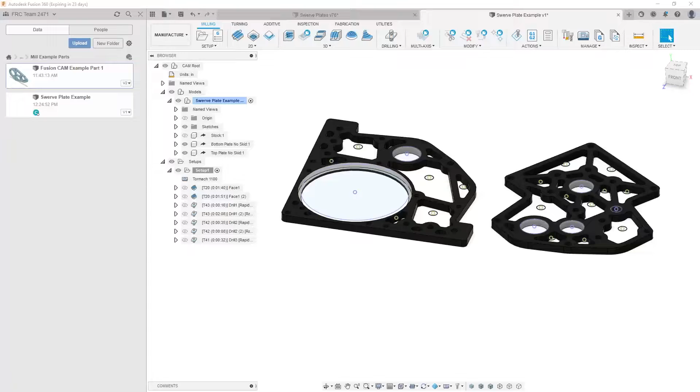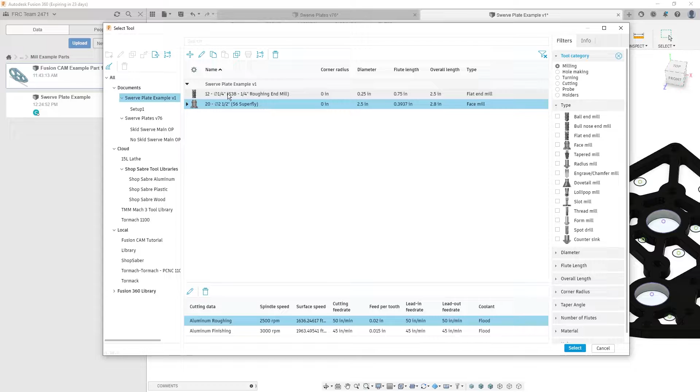So now that all the holes have been drilled, we are ready to get into actually starting to make this look less like Swiss cheese and more like an actual part. I'm going to start out with a 3D adaptive clearing. I'll grab number 12, which is our roughing end mill.

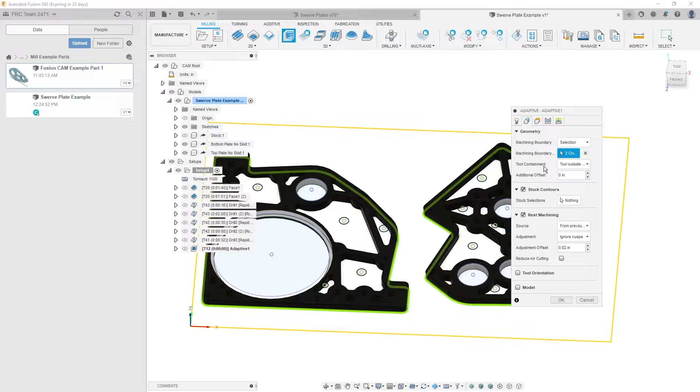And for the geometry, what we're going to do is set our selection. I'm going to grab these parts. I'm going to tell it it's anything outside the boundary, which means it will cut everything inside it, but will not cut outside. If we didn't do this, the 3D adaptive is going to try to get rid of all the stock.

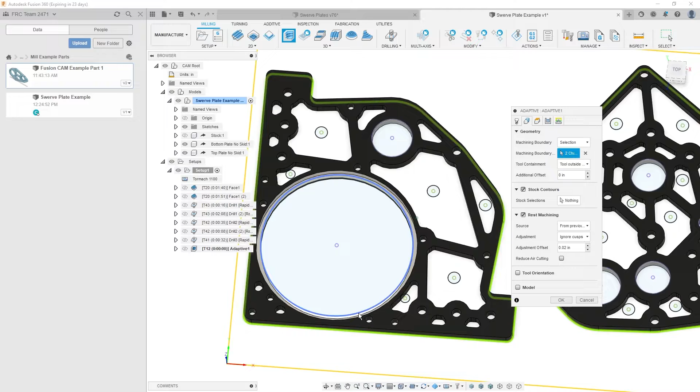We don't want to do that since we're doing it from a larger sheet that we're going to cut it out of later, right? But it thinks that its goal is just to get rid of all the stock. We want to just get rid of stock that's unnecessary within the part's outside profile. So that's why we're doing this.

Rest machining we will do from previous operations. This will just make it so that it actually looks at where there are holes for it to go into. And also it will not try to kind of cut in a corner where there's a hole. So that will just kind of speed up our cycle time a little bit.

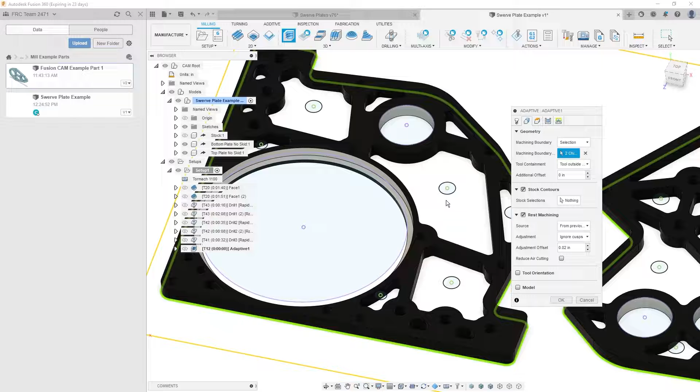For our bottom height, we're going to go ahead and do stock bottom. I'm going negative 0.03. And then for stock to leave, we will go 7 thousandths on the radial, and we will go 0 on the axial.

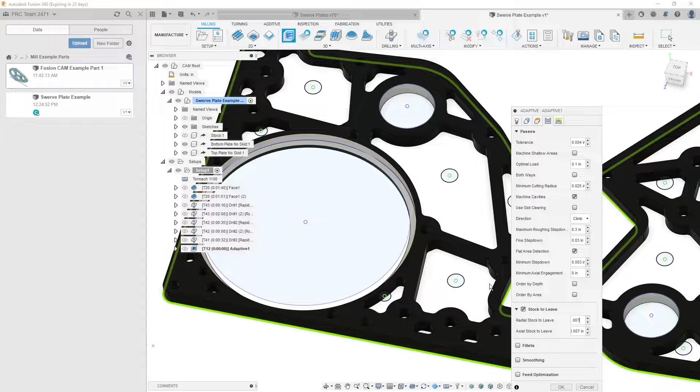And we're going to hit OK and see what that generates for us. So we'll give this a second to generate. And I have an idea of something that's going to generate that we're not going to like, but we will see if that does in fact generate how I believe it will.

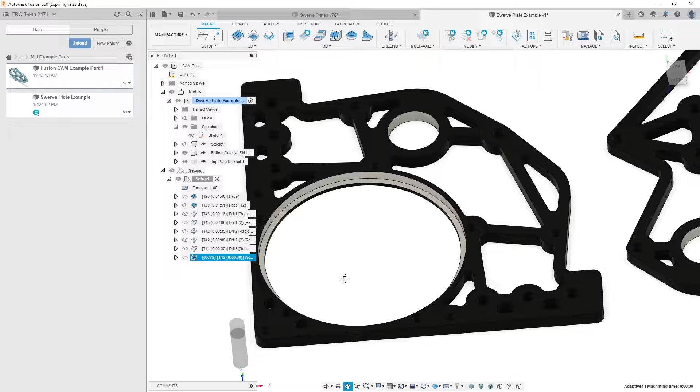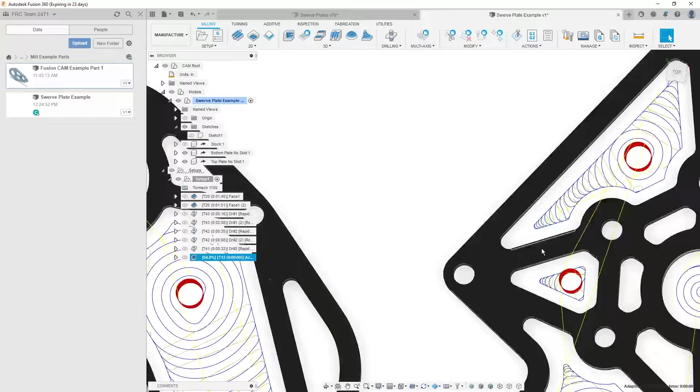So it hasn't quite finished generating, but I've already noticed a few things that it's doing that I do not want. First off, it is not forcing a plunge move, it is forcing a helix, which is okay. That's relatively simple for us to force. But also, it is going into some holes that we do not want it to go into. Just because of how we have set it up, drilling, and drilling out those corners, some of these helix moves we just don't want.

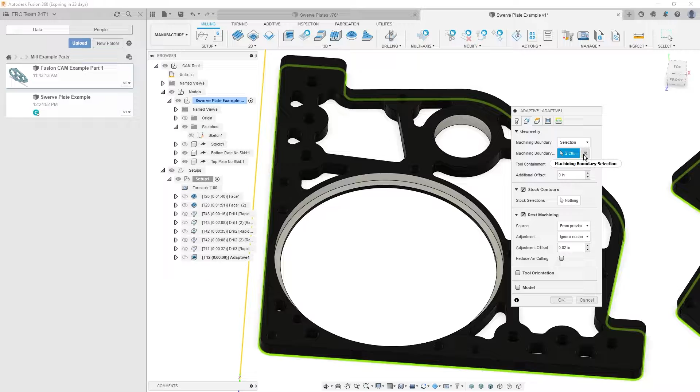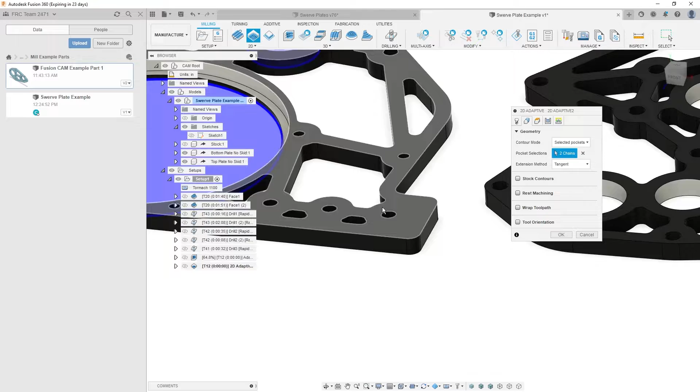So what we're going to do instead, we're going to do geometry. Well actually before this, we're going to right click it and hit suppress. You can't suppress it when it's being generated. Okay. Anyway, we'll ignore that for now, and we're just going to grab all of these bearing bores. This will just isolate them so we don't have to worry about them.

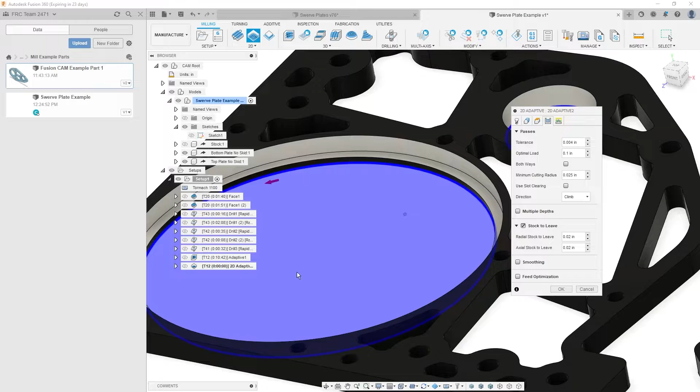The 2D adaptive is going to make it so things generate faster, and it will make everything a little bit neater for us. And the most important thing is we need to have this large bearing bore be separate, since it has this flat pocket kind of edge we've got to deal with. In the 3D adaptive, with a stock bottom on our bottom height, it's not going to treat this shelf properly, and it's just going to cut right through it.

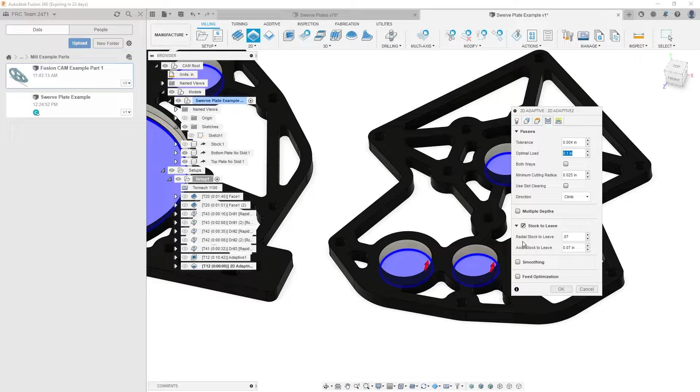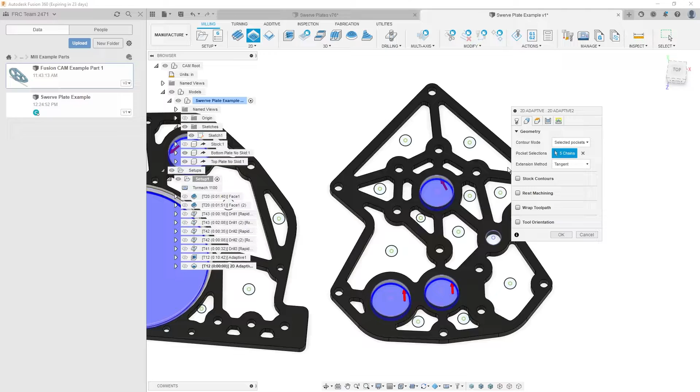So anyway, we'll put 7 thou, not 70 thou, oopsies, 7 thou on the radial, 0 on the axial, and then we're going to do plunge. We're going to hide the sketch, entry positions, we're going to click these, and then we have 5 chains, and we have 5 entry positions, so that looks good to me. Perfect. That generates all fine and dandy. So that's exactly how we want it, and we're going to move on.

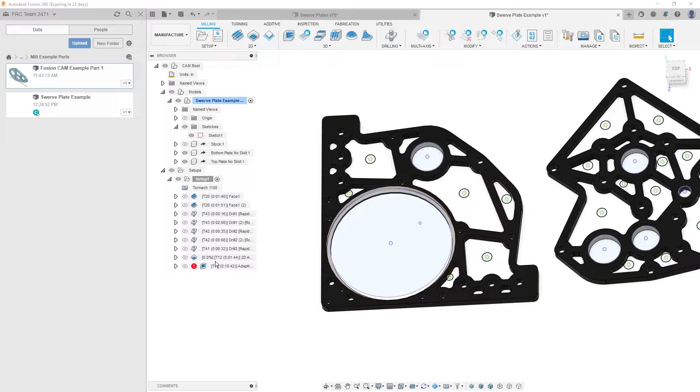We're going to put this above our 3D adaptive. We're going to go into our 3D adaptive, and we're going to get rid of these machining boundaries. Instead of over parts, we're just going to select the actual ones we want to machine. This one, this one, this one. So basically all these that we've drilled with a 266 drill. And we're just going to force it to go inside all these.

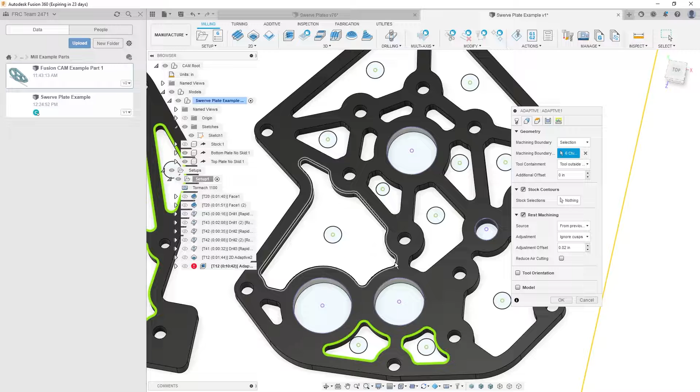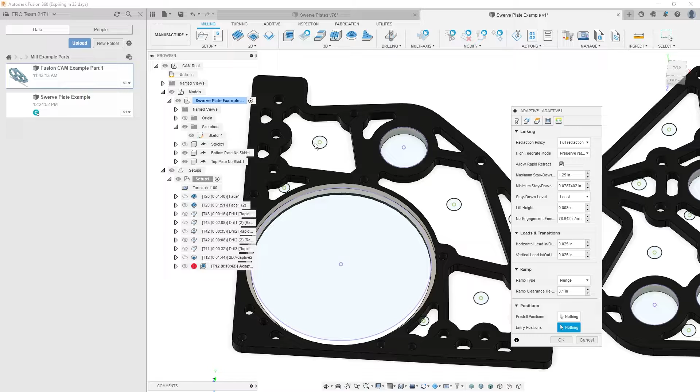Right, and it's got 14. So then this is all okay from before. For our entry positions, well, first for a ramp, make it plunge, entry position. We are going to say 1, 2, 3, 4.

Yeah, and we have 14 entry positions and 14 machining boundaries, so we shouldn't have missed any. So this will go ahead and generate. So I got an error. I don't know why. We're gonna check this out. So it says feature flag and adaptive turn roughing, which makes no sense because we're doing a 3D adaptive, not a turn roughing, which would be for a lathe. And the error is an internal CAM kernel error. Please report 3D.

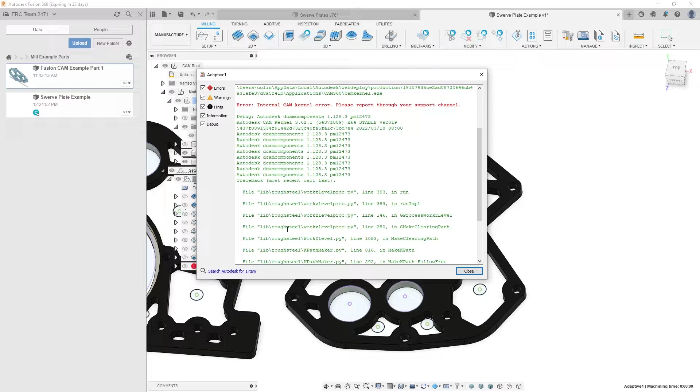So usually these error codes are a lot more kind of point you at a direction, like a lead fail or something. But in this case, I have no clue. So we're just kind of going to go through this again. One thing I'm going to do just to see, I'm just going to uncheck rest machining. There's no reason we need to rest machine this at all. So we're just going to see if that works, and we'll go from there.

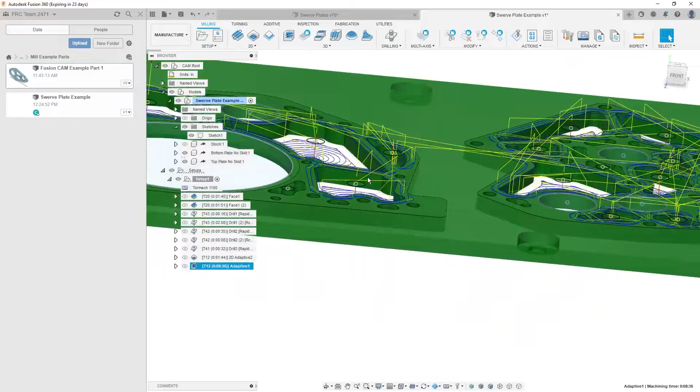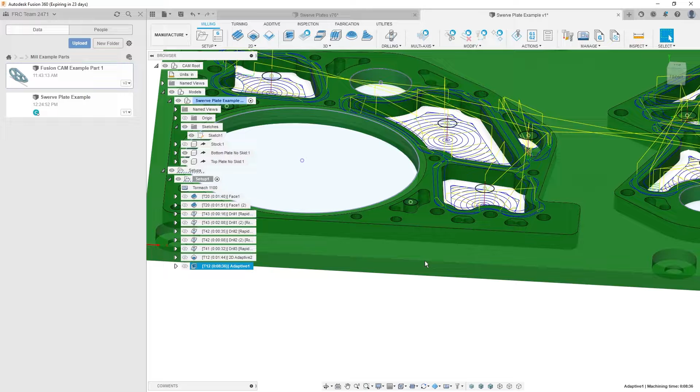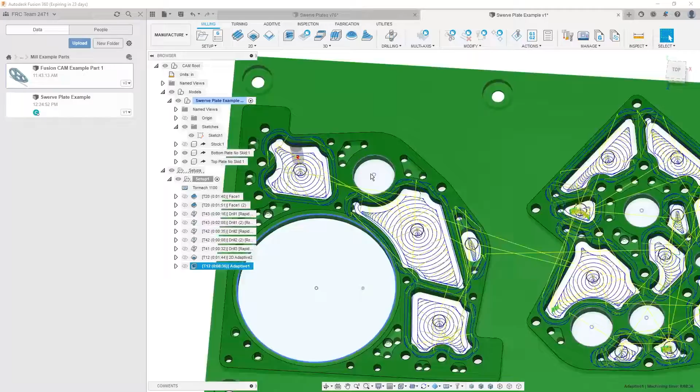So we finished generating it, and something weird has happened. So it's trying to get around the edges of these pockets, and the reason for that is, once again, the 3D adaptive, the stock that it's spacing everything off of, is only so accurate. So since we got rid of rest machining, it doesn't know that we came in and we faced this off. So it thinks there's still stock there. It thinks it's the very beginning where we have this 15 thousandths of material above it. We weren't able to use rest machining because it was creating some form of error, but that's okay. We can simply get around this.

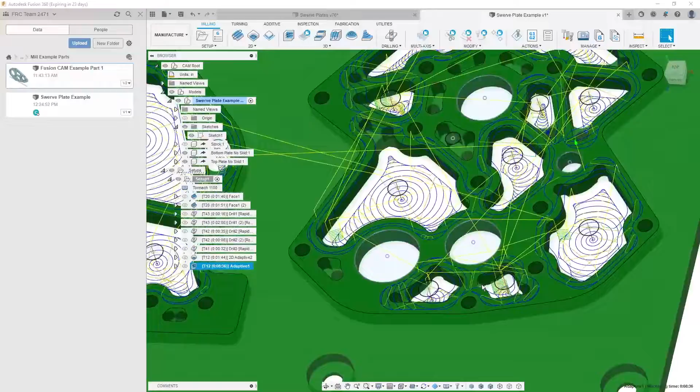But also, another thing I notice is in here, it's doing these weird little step downs. So it's going to come in at this height and do this little tiny cut and go all the way out and then go all the way up, all the way back down, little cut, all the way up, all the way down. That's going to just waste a lot of cycle time, and it looks like it's doing it there too. So it's doing it in a few spots, and that's a fine step down. For some reason, Fusion is thinking that there is a feature here that needs to be used with fine step down. There is not, so we're just going to override that.

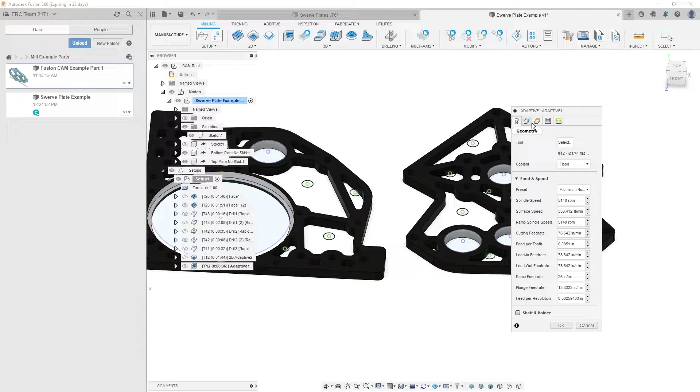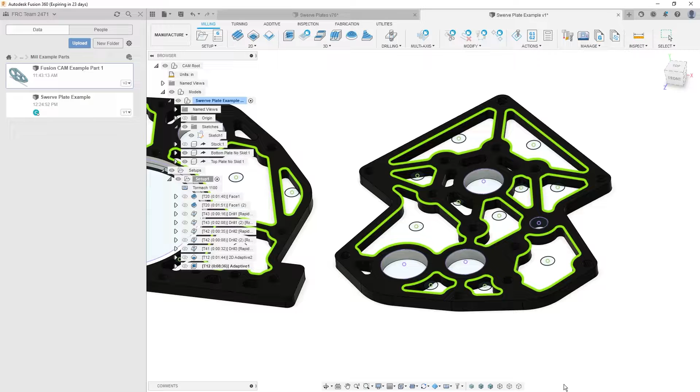So we're going to go back into this adaptive once again, and we're going to fix two issues. First off, instead of saying stock top, we're going to do selection, and we're going to grab the top of this face. So that should get rid of that first issue with it cutting on top. Then to get rid of those fine step downs, under our passes tab, here we have our maximum roughing step down, which is 0.3, which is good, and we have our minimum roughing step down. Our fine step down, that's at the 30 thousandths. So we're just going to get rid of that 0 in front of it, set it to 0.3, the same as our maximum, and that's going to force it and say you can only take a 0.3 step down, or less, obviously, but you can't take like a 0.1 or a 0.2.

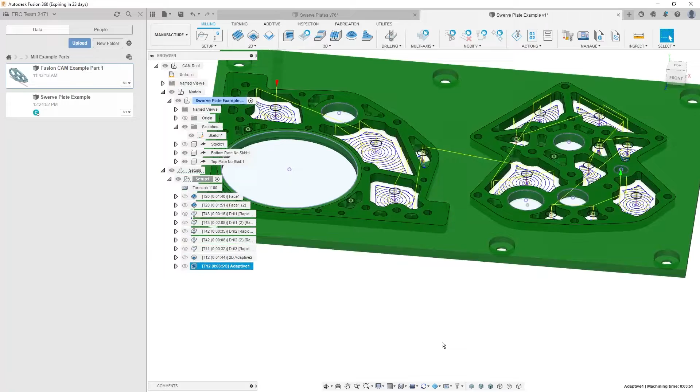And we can also see how fast that generated now. And we went from 8.5 minutes to just under 4 minutes by getting rid of those two settings. Granted, most of that was definitely the top height being wrong. However, this is looking very good, and we're going to go ahead and get into the 1/8 inch tool. So we're going to start by doing a rest machining on this.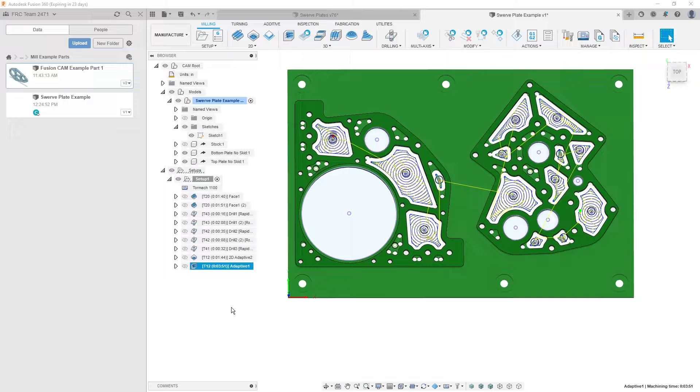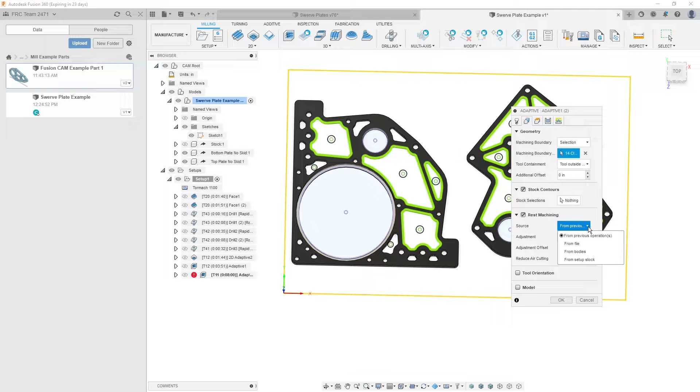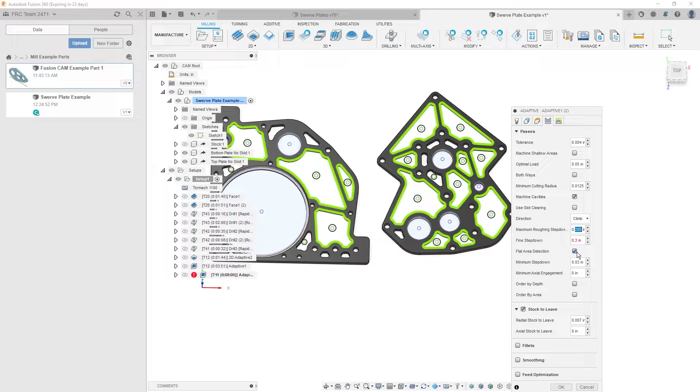To do this, we're going to duplicate this toolpath once again, Control T, right? But we don't want a 1/4 inch tool, we want our 1/8 inch tool. So go to our tool library, it's tool 11, we'll do aluminum roughing, boom, geometry, this is all okay. Stock contours is okay. Rest machining, we'll do from previous operations. We're going to click reduce air cutting. That's going to try to reduce that fine step down stuff that we did see. However, we are going to override it manually too. This is all perfect. Since we just duplicated it, this is okay. And this fine step down, it's zeroing out because it is now larger than our maximum. But we will just, oopsies, we gotta put a decimal point in front of that. Toss that in there, and we will be good.

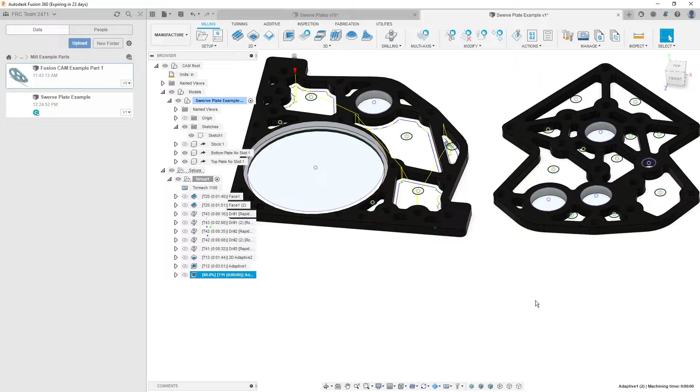Entry positions are saved. And we're gonna call that to see how it generates. Yep, and we can already see, right, on these ones it's just barely rubbing those corners, and on this one it's got to go a lot more. It's going in and it's getting those corners perfectly, and that's exactly what we want to see. It's doing some, you know, a little funky stuff, but it's pretty darn good for what it is.

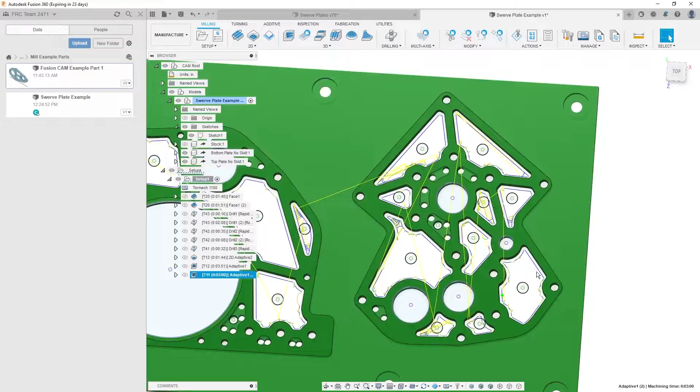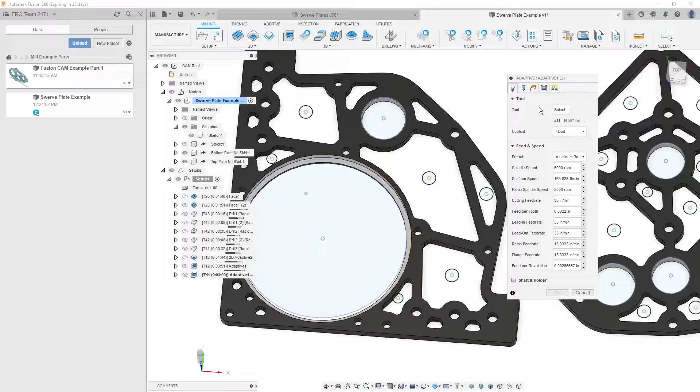Okay, so now what we need to do is we need to make another 3D adaptive, but this time instead of doing a rest machining, right, we need to get all these spots that we didn't get in this first round. So to do that, it's going to be our machining boundaries we're going to have to change. So we didn't get you and you. And we're just going to go around and we're going to get all the little cavities that we didn't get the first time around.

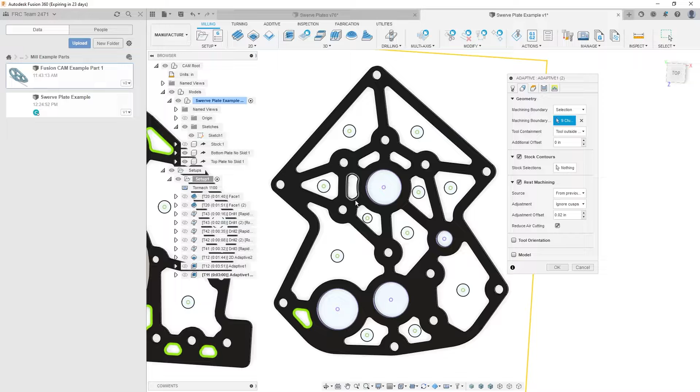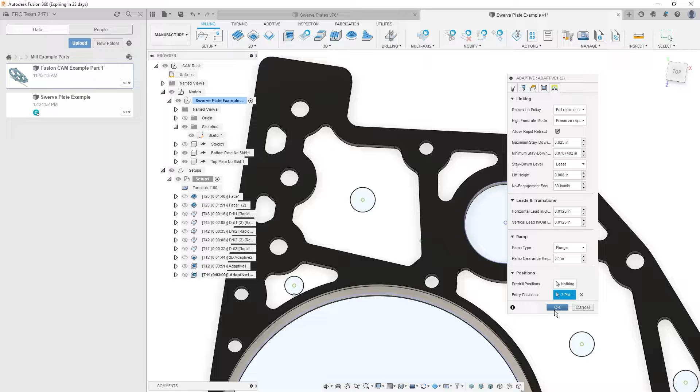And see, you, and I think that's it. And then what we'll do is our entry positions, right? We're going to do our best right on these. There's 3 points that we have, you, and you. And then we're going to see if it generates properly. There's a chance it will, and we won't have to mess with it, but there's a chance it won't, and we will have to go in and actually sketch it.

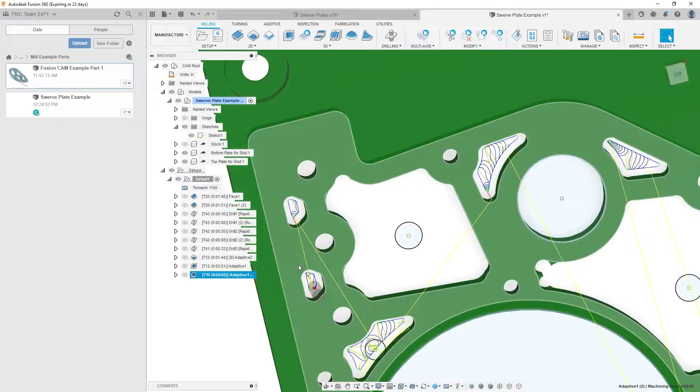But, actually this point is completely off, oopsies. But, if we are lucky, the 3D adaptive should be able to get in there and plunge. But we're going to see how it generates, of course. So it looks like it's doing its job correctly. See, it's going in on these spots that we have cut away. So we're going to simulate this real quick.

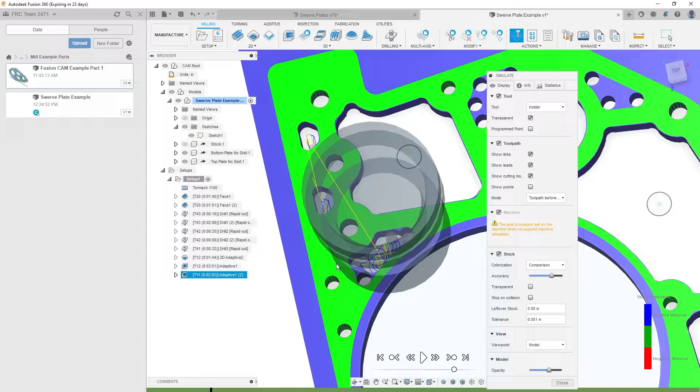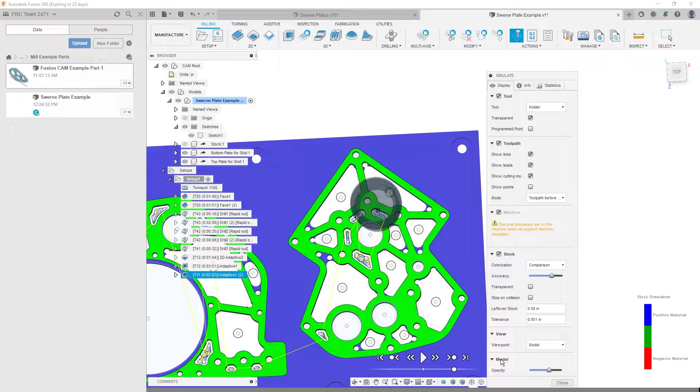Yeah, and it's going in there and it's getting those. And that's exactly what we want to see. That's perfect. One thing I am noticing is for some reason on the rest machining, oh, somehow, okay, well, I forgot to duplicate that. That's me being silly.

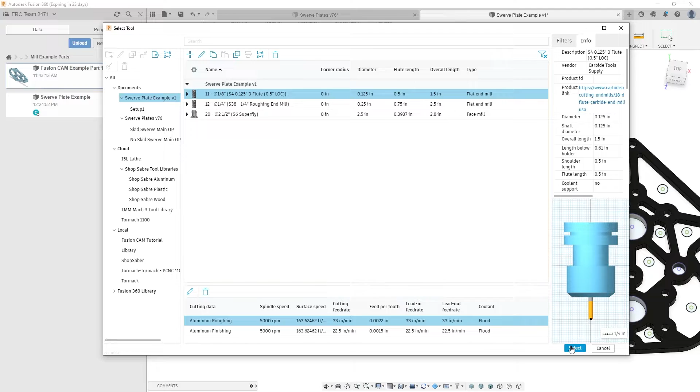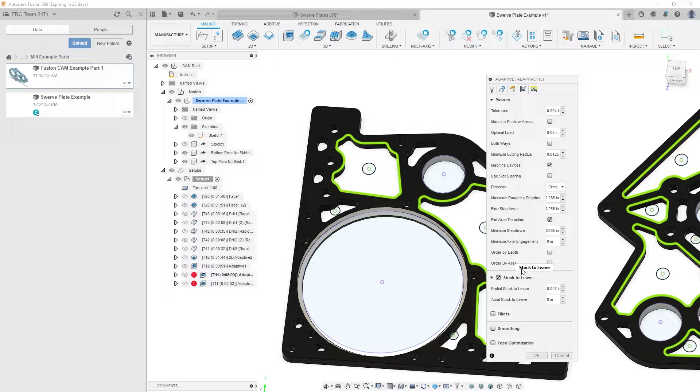Anyway, I will just have to redo the rest machining really quickly since I overrode it instead of duplicating it when I made that new 3D adaptive. So that's a goof on my part, but it's relatively simple. Go here. Right, make it. This will generate, and then we'll have this generate right after. We're going to simulate real quick on this one, just to make sure we're all good here. And that looks a-okay to me.

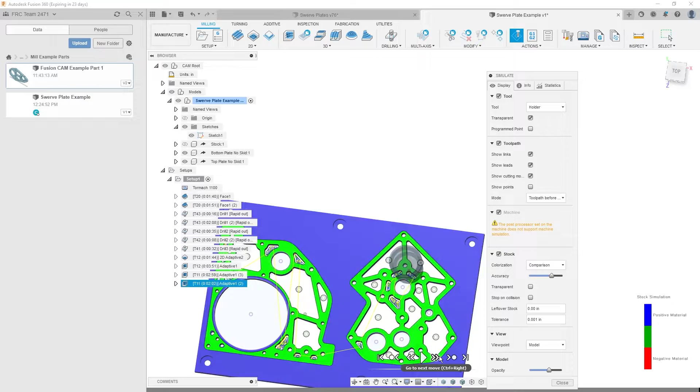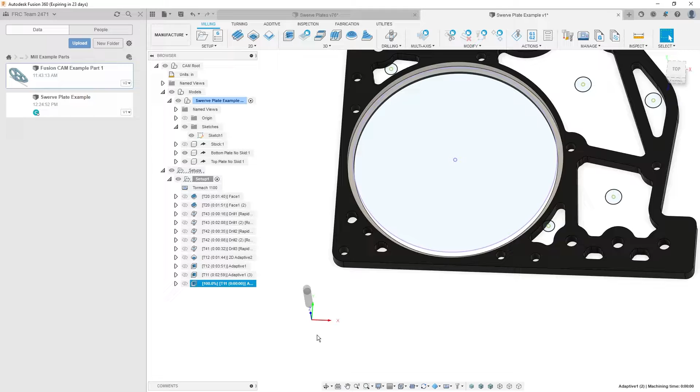So now that we're done roughing our part, we're going to move into, I lied, we're not done roughing our part. Forgot about these ones right over here. So we'll grab those real quick. But now that we are actually done with the part, we can start moving into finishing. So the first thing I'm going to do is I'm going to deal with these bearing holes. You, you, you and you, just these two.

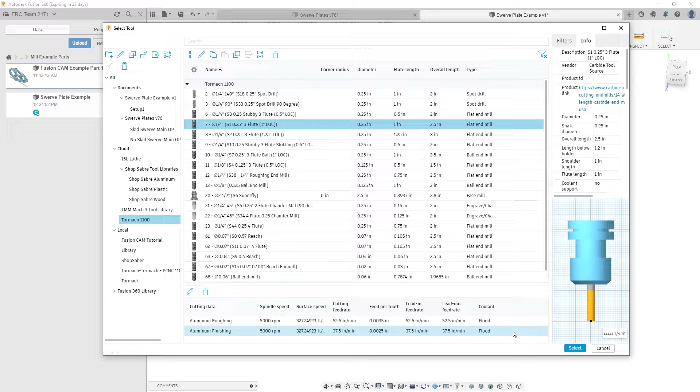So to do those, I'm going to do a 2D contour. I'm going to grab our finishing bit, which is tool number 7. Go to aluminum finishing. And I'm going to click you. On the heights, right, we're going to go stock bottom. I'm going to go negative 0.03.

I'm going to do repeat finishing passes, which is also known as a spring pass, and that just means that once it goes around in a circle once, it's going to go around in a circle again, just to combat any deflection that happens. And I'm going to go stock to leave 0 on axial, but on radial, I'm going to leave just maybe like 3 tenths. And the goal for this is I want to be slightly under the nominal size so that we can have just a slight press fit for the bearing, so it's not all loosey-goosey.

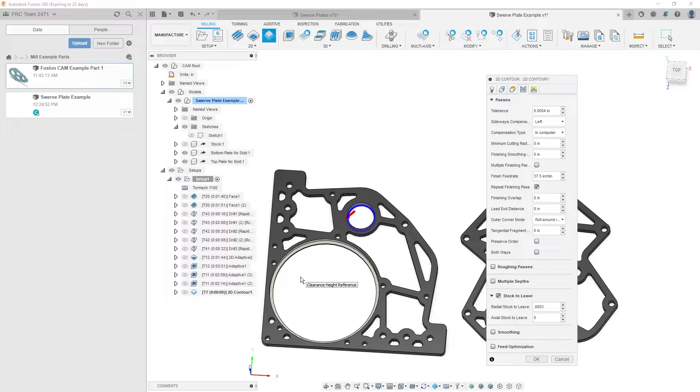But then also, I'd much rather have to rerun the cycle once at the very beginning when I'm dialing in the program on the machine, than accidentally overshooting this tolerance and the bearing just kind of wiggling around in there, which we definitely do not want. So just kind of prematurely wasting the 5 minutes it takes to repost this program with a different stock to leave, than risking wasting all the time that we've done of roughing and drilling up to this point, because it's around 30 minutes or so. And we just do this once, we get it right, and then from there on out, for the next 11 times in the cycle, it's spot on.

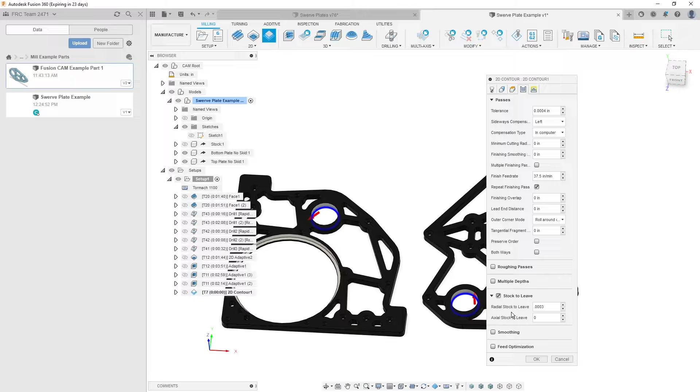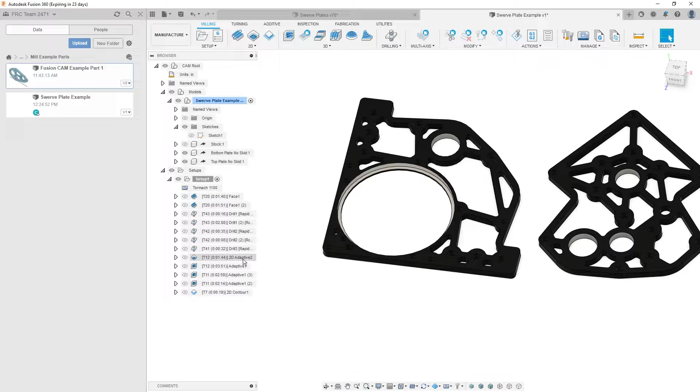Make sure this adaptive thing, right? So then that's just going to go around, walk around there. Now we're going to do the same thing. Actually, I'm going to duplicate it this time, but instead we're going to be doing our 2 Falcon holes.

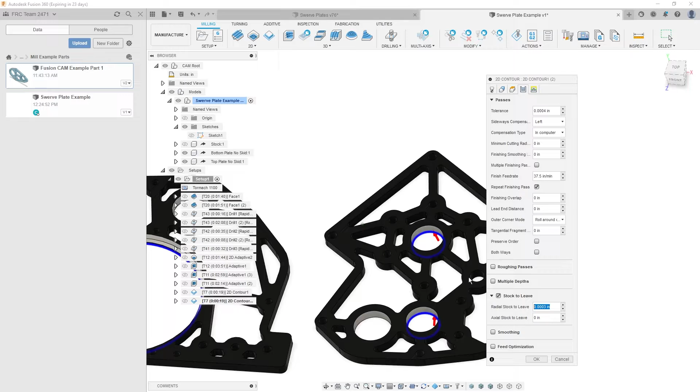Now, under the stock to leave, we don't want these to be press fits. We want them to be slight, kind of just a slip fit. So right now they are modeled nominal, like for these Falcon holes and for this clearance hole, just for the forks on the swerve. They're modeled to a nominal size. So for the Falcons, it's 3/4 of an inch.

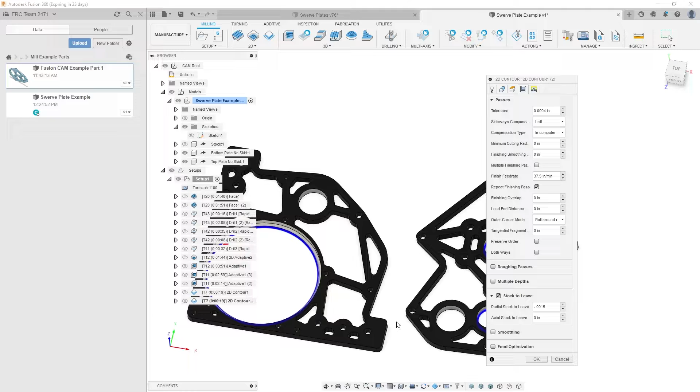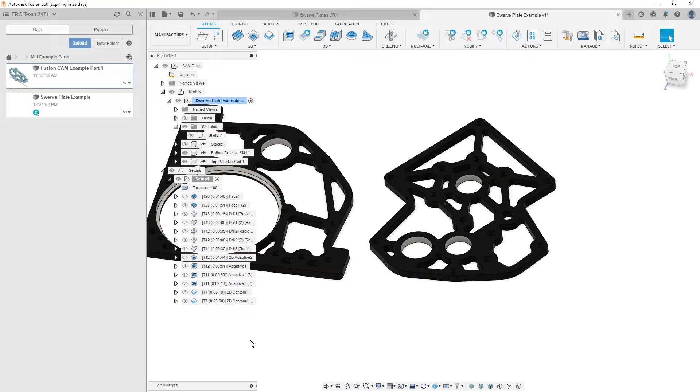But we're gonna go ahead and do a negative stock to leave of just like 1.5 thou, and it's just gonna make these bores just slightly bigger, which we want, especially in the Falcons. I find that they are slightly oversized from nominal, probably due to whatever coating they have on it. I don't know if they account for that with their 3/4 nominal size. And you still definitely want these to be snug, but they do not need to be a press fit at all, and they should be easy to get in and out.

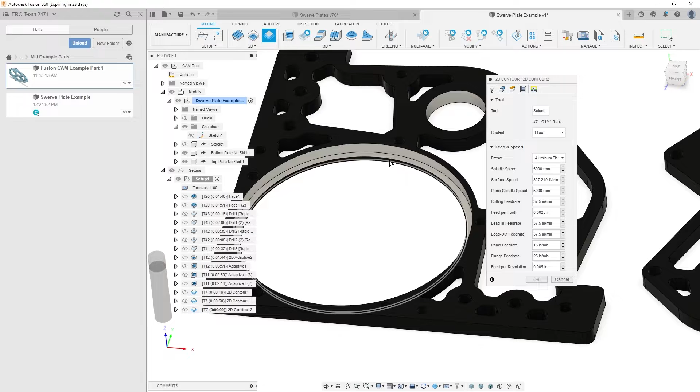So those are good. The last part we need to finish with a 1/4 inch bit is going to be this edge right here. And to do that, once again, we're going to do a 2D contour with our same number 7 bit. But then over here, we're going to do roughing passes. We'll do a maximum step over of 50 thousandths. What percentage would that be? 0.05 divided by 0.25. That's 20% step over, which is reasonable.

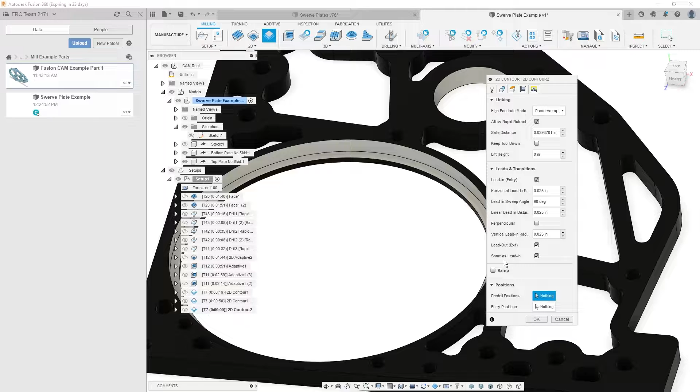And then to start off, I'm just going to say 4 passes. I don't really know how many. Make sure we click repeat finishing pass. And then everything here should be good. We're going to hit OK. Now we're going to watch the simulation. And we're going to see that there's definitely too many passes to start out with. Oops, that was way too fast.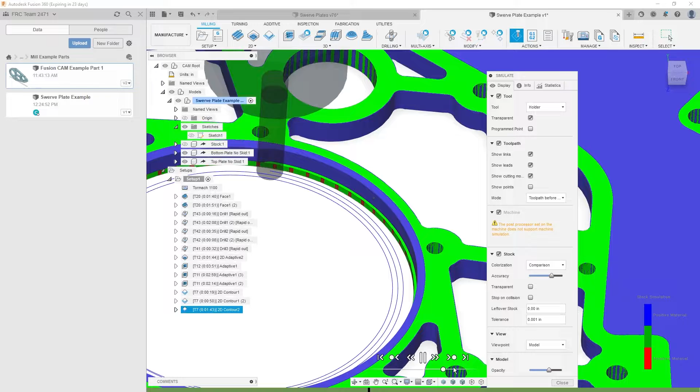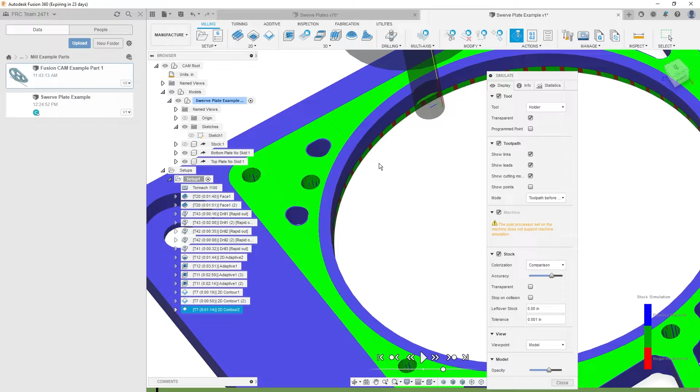So the first pass does absolutely nothing. The second pass does absolutely nothing. The third pass actually starts to cut. So that means that in here, I can go down from 4 to 2 roughing passes, and we will be a-okay. So we're just gonna simulate this real quick. Make sure. And that looks good to me. Perfect.

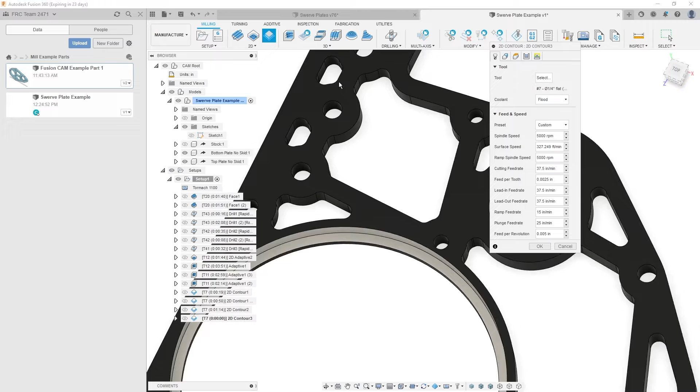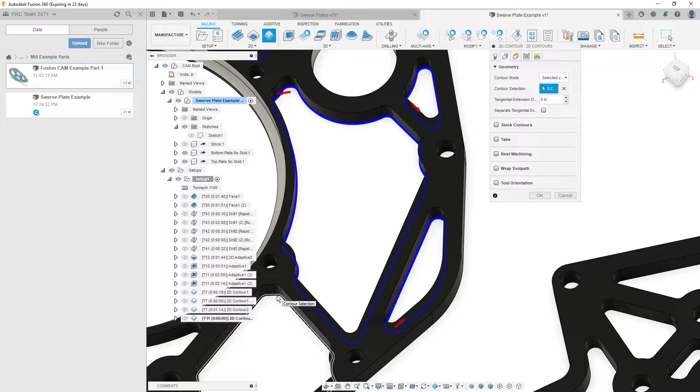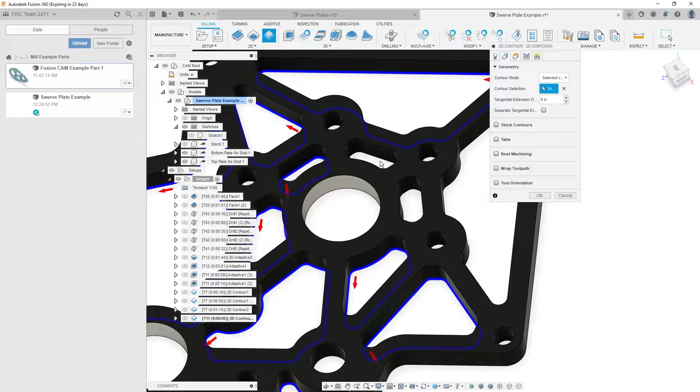So at this point, we've finished everything with the 1/4 inch bit, and we're going to go to our 1/8 inch bit. And that's going to be all of these features. So under the 2D contour, we'll actually start by selecting our 1/8 inch bit, aluminum finishing, and then we'll have to select all of these. Okay. Alright, we'll make the stock bottom. We're gonna go 30 thou under. And that should be it. That looks good to me.

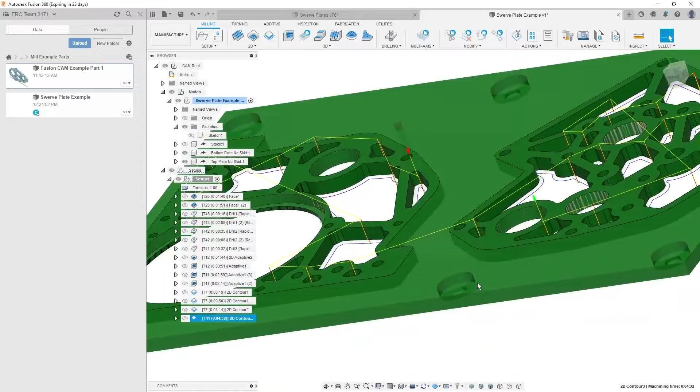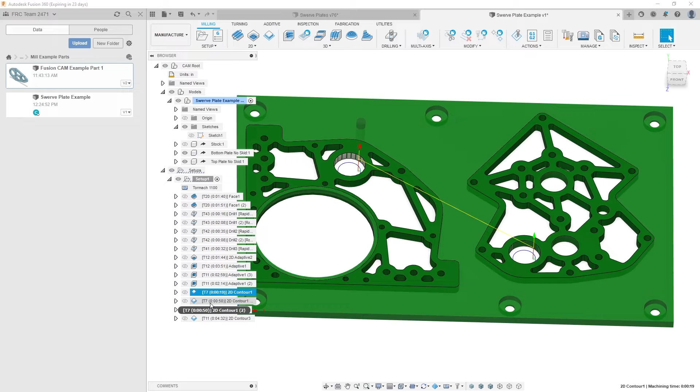So one thing that I'm just now remembering is we can see, right, we're going tool 12, tool 12, tool 11, tool 11, tool 7, 7, 7, back to 11. So we really want to put these 3 finishing passes before these 2 adaptives, just because that reduces our tool changes, right? Instead of having to go to tool 11, then go to tool 7, then go to tool 11 again, we can just go to tool 11, stay at tool 11.

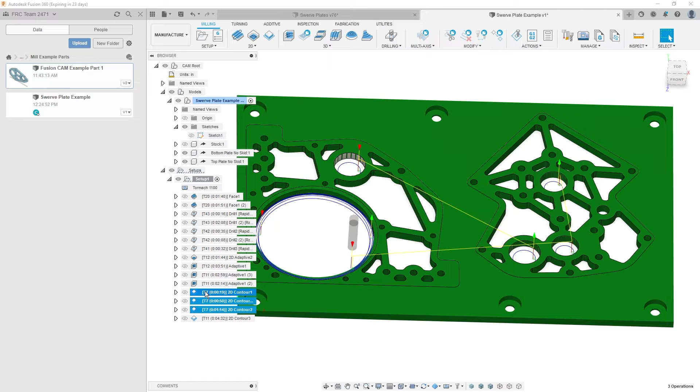Of course, we could also put this contour above. I do like going from a larger tool to a smaller tool, so I will choose to just go ahead and toss these right above those. Sadly, that does mean we will have to regenerate these tool paths, but they are not taking too long, so it's okay. So anyway, I'll let these generate, and that will be it for this part.

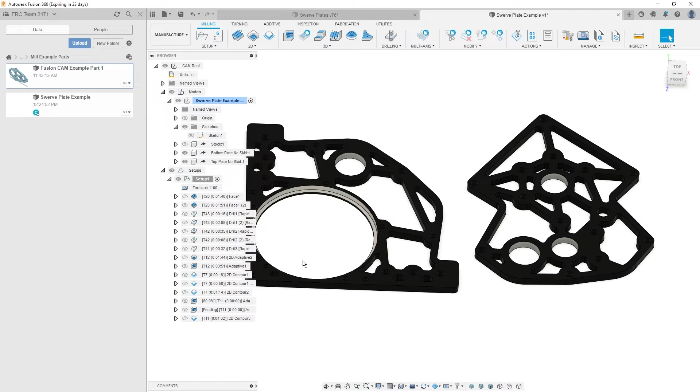And in the next part, we're going to go over just finishing touches. So like chamfer, we're going to get this thread milled for the encoder, and then we're going to actually cut out the part. And that should be the conclusion of these parts.